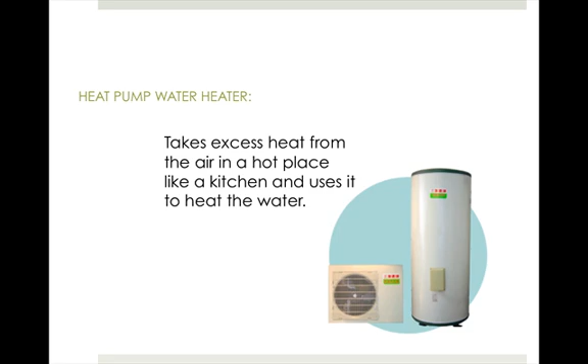A heat pump water heater will take any excess heat from the air in a hot place like a kitchen near a stove or some sort of generator and uses it to heat the water. It dehumidifies the air in the process and only uses about 1/3 the amount of energy as a standard water heater. But obviously, these could only be used in specialized situations.

This is the most common type of water heater used. It's called a storage tank water heater. Residential and small commercial buildings will use these. They're generally centrally located, so the water doesn't have to travel very far distances, and will come in 20 to 80 gallon capacities. Some may use gas or propane or some sort of fuel to keep it heated, or others can use electricity. If you have a gas bill, it's likely because your water heater is heated through natural gas.

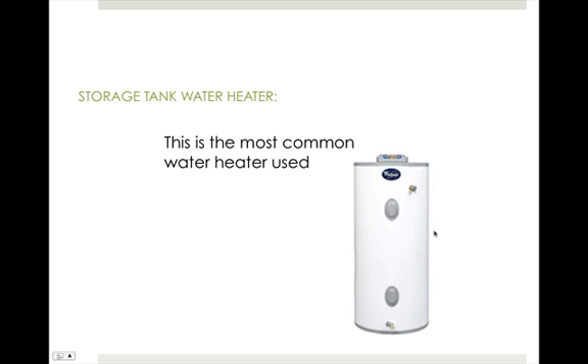Now, these are considered probably the least efficient way to heat the water, because basically all this water is being continually heated when it's not necessarily being used. So if you ever run out of hot water in your house, it's because you've emptied this tank and it has to be refilled again. So you can imagine that most of the day you're not using hot water and yet it's still being heated and stored. Not very efficient.

An indirect water heater will use a boiler or a furnace as a heat source. So it sort of doubles up on the energy that you're already using maybe to heat the air. And these can be a fairly inexpensive and low energy way to heat water.

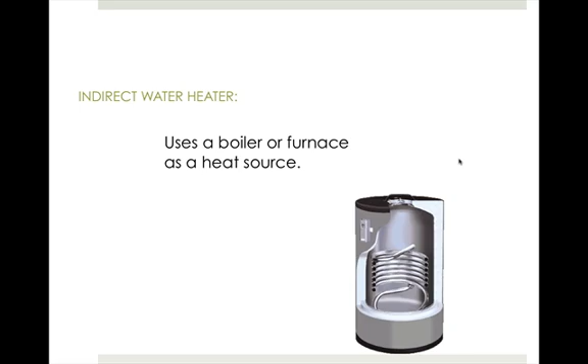So here's a lot of information on how to keep a water heater more energy efficient. As I mentioned, they should be located centrally so that less heat is lost in long piping runs. And if they're located in a warmer area, they'll lose less heat. So if you have a mechanical room that's already generating some heat, it's a good place to put a water heater. Heat traps can be installed on hot water and cold water lines to conserve energy. Low flow shower heads, faucets and toilets can save not only on water heating, but water itself.

And a hot water recirculation system is basically a series of pipes that continuously circulates the water between the water heater and the faucet. Now you may think that this will use a lot of energy, but it keeps the water available instantly and can also kind of heat the interior environment of your home. If you use some kind of smart computer control, you can definitely save energy on your water heater. Maybe you turn it off when you don't need it and turn it back on when you do.

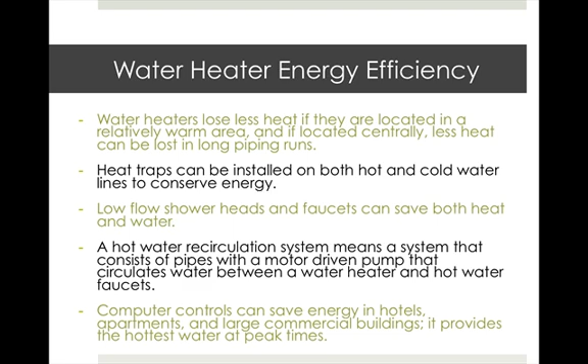The movement of a fluid because it's been heated is called a thermosiphon. So hot water pipes are arranged in distribution trees, and water is circulated through them using this thermosiphon principle. Basically, the water expands and becomes lighter as it's heated. Warm water rises to be used, and when it cools, it returns to the bottom of the tank. So if buildings are too low or too large for a thermosiphon, then a forced circulation method will be used.

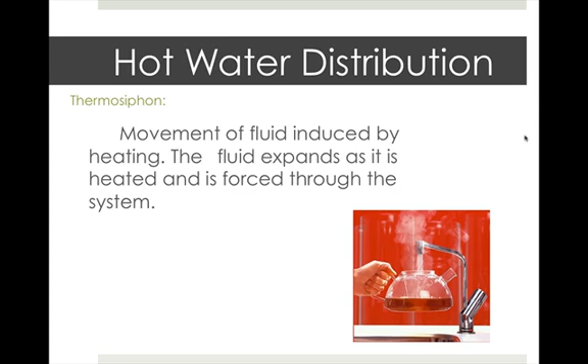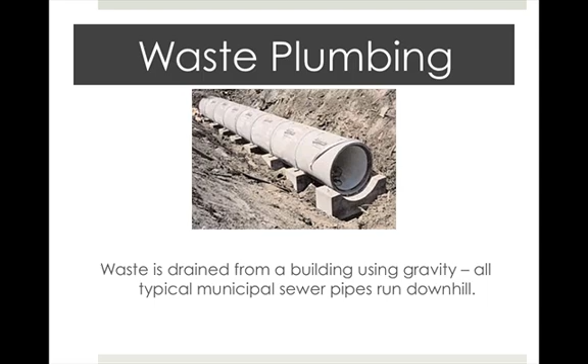So now that you understand how a building gets a clean water supply, let's talk about how it removes waste. Waste plumbing is a separate system, and all waste will be drained from a building using gravity. So if you have a fixture that's placed below the sewer line, you're going to have to create some sort of mechanical way to get that waste to the sewer pipes. All sewer pipes in the city will run downhill. The underground sewer pipes can be made of clay tile, cast iron, copper, concrete, or some sort of plastic. Cast iron is typically used inside buildings.

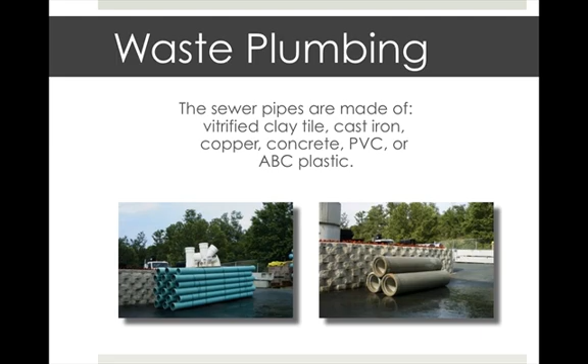Because all pipes run downward at an angle, it may be difficult and expensive to add new plumbing fixtures into existing systems. So as an interior designer, you should be very careful about locating toilets. It's easiest to place a fixture on an exterior wall to allow for venting, but if the wall is not 2x6 framing and it's CMU, then you have to add drywall, and it must be furred out to fit a 6-inch pipe.

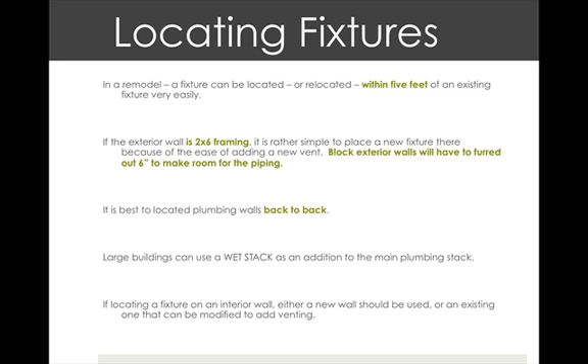You should also try locating plumbing walls back to back so that they can use the same draining system. And in larger buildings, the plumbing layout should be decided as early as possible. If you're doing a lone fixture like an executive bath, then the pipes will have to run horizontally to the main stack. Here's an example of a back-to-back plumbing system. So you have bathrooms that share this plumbing wall. That way they only need to use one waste stack.

Cleanouts are distributed throughout the system between the fixtures and the outside sewer. They're also required at the base of each stack and at certain directional changes. Cleanouts must have access for the maintenance room and the plumber to work, which may affect the interior design of the space.

Here's a great diagram of a building's drain, waste, and vent system. Now the soil stack is the waste pipe that runs from the toilets to the building drain. The waste stack is the pipe that runs from the other fixtures like the sinks and the showers to the building drain. And then the building drain connects to the municipal sewer or the septic tank.

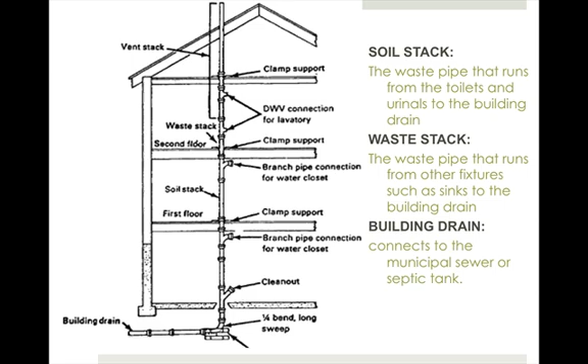So here you can see this is the building drain, the waste stack coming from the sinks, the soil stacks coming from the toilets, and then it heads down here, all using gravity, to the outside. A vent is required. So you'll see these little pipes sometimes sticking out of the roofs. The vent is required to ease the pressure of what's happening inside these pipes.

Traps are sometimes used in certain buildings to prevent any undesirable materials from entering the sewer. The city can only handle so much waste, and if you dump a lot of grease into the sewer, for example, that's very difficult to clean. So a lot of times restaurants will use what's called a grease trap, and it keeps the grease from entering the system, and then they pay for a service for someone to come and clean the trap regularly.

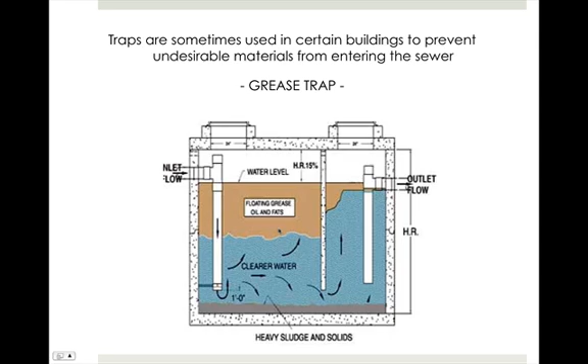Now, every fixture must have a trap. Every fixture, meaning every toilet, every sink, every shower system. Every fixture must have a trap, and every trap must have a vent. Some fixtures have traps already included. Traps are used in waste plumbing to block the gas from backing up into the building.

And in older homes, some may have used a drum trap in the bathtub. And that's why maybe you have some drainage problems, because they have to be regularly cleaned out. Traps keep the gases out, but vents must be added to relieve the pressure in the pipes created by the gas. These run up, connect together at some point in the building, and then poke through the roof. And they keep the air pressure in the system even and give the gas an opportunity to escape outdoors.

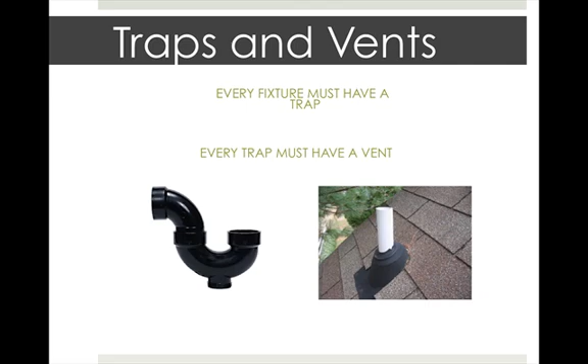If a sink is located in an island, there's no vertical wall for the vent pipe to run up. So in this case, a waste line has to run to a sump or a collection container in another location, and then is given a trap and a vent.

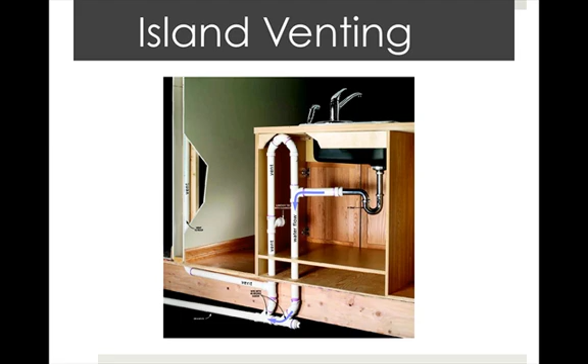Most of the solid waste comes from the kitchen, so having a recycling cabinet with possible easy outdoor access is a nice feature inside the space. Trash compactors are not really the greatest choice. They take up space, use energy, can emit odors, and require a grounded outlet. Garbage disposals must have adequate horsepower so they are more efficient, and also usually require a grounded outlet.

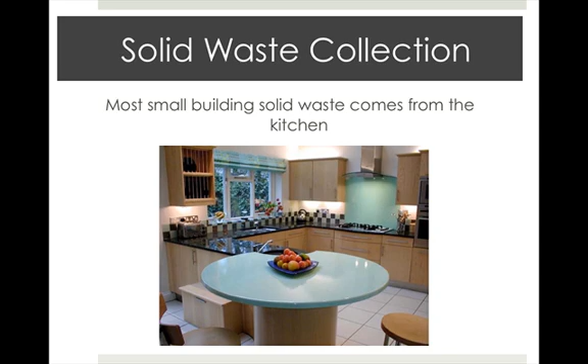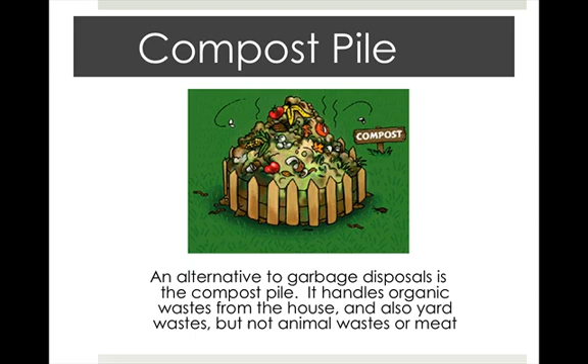An alternative to garbage disposals is the compost pile. It handles organic waste from the house and also yard waste, but no animal waste or meat, and can be contained in a self-contained unit. Once the garbage is decomposed, it can be used in the garden to fertilize the soil.

So some of this pertains to you as an interior designer, but other parts of it are just for your information. Now, garbage bins located on the grounds of large buildings should be fenced to keep out animals and pests, and include recycling bins and possibly a compost pile for the landscaping. They should also allow easy access to the garbage trucks and consider the wind direction and noise control.

There are 3 stages in the recycling process for large buildings. One, you, the designer, will include 3 separate trash bins near the employee work area, one for paper, one for compostables or mixed paper, and one for trash. The custodian then collects the separated waste from the bins, and then the carts are dumped into the appropriate larger bins that are then picked up by the city.